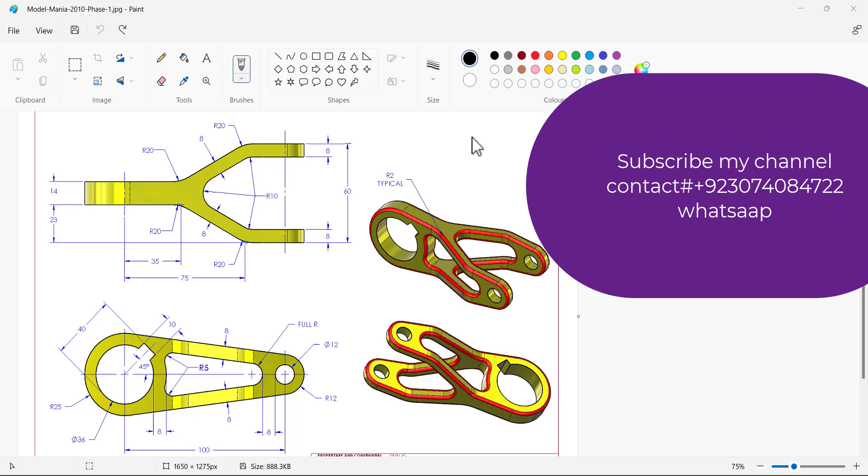Maybe you all know the Model Mania, the SolidWorks Model Mania competition for students. Every year SolidWorks gives a model and they want us to design it. So today we are going to design this model.

By the look, maybe you feel that it is difficult, but it is not very difficult if you visualize this drawing. If you see this isometric view, you may feel it's something like difficult, but actually it's not. You just have to follow the drawing.

If you see this view, it is very simple. We have to draw two circles here and two circles here, and the dimensions of these circles are given, and we have to specify the distance between them, 100 millimeters, and then extrude this sketch for 60 millimeters. After that, we are going to make some cuts here and here. The dimension is 8 mm.

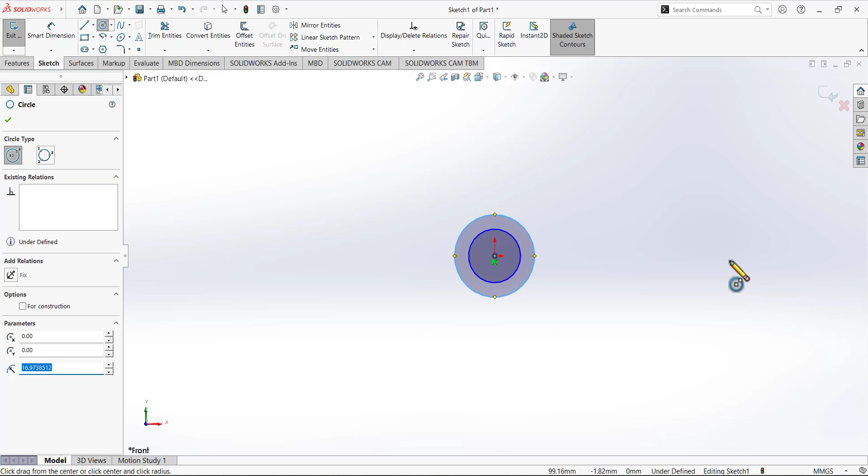So we are going to design this model in SolidWorks. I'm going to open the sketch on the front plane. I'm going to draw circles like that, and two circles here.

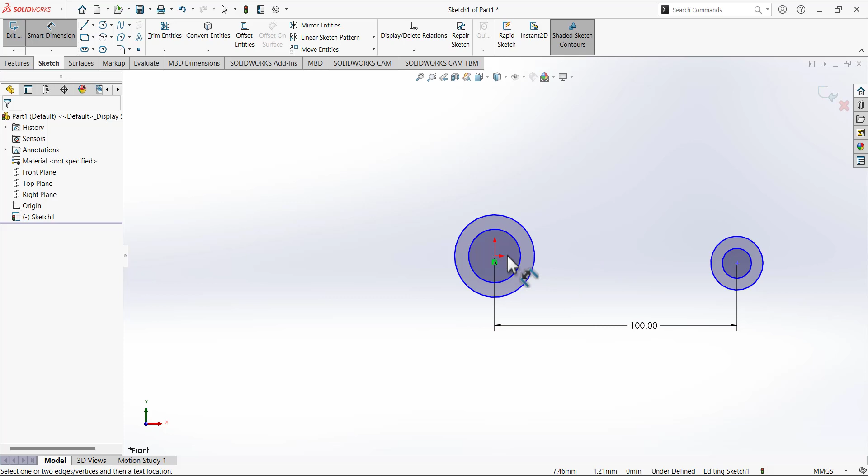The distance between these two circles is 100 mm. So I am going to put this distance, which is 100, and I am going to define a relation between this point and this point. This relation is horizontal. We are going to add the relation, select this center, and add a relation of horizontal.

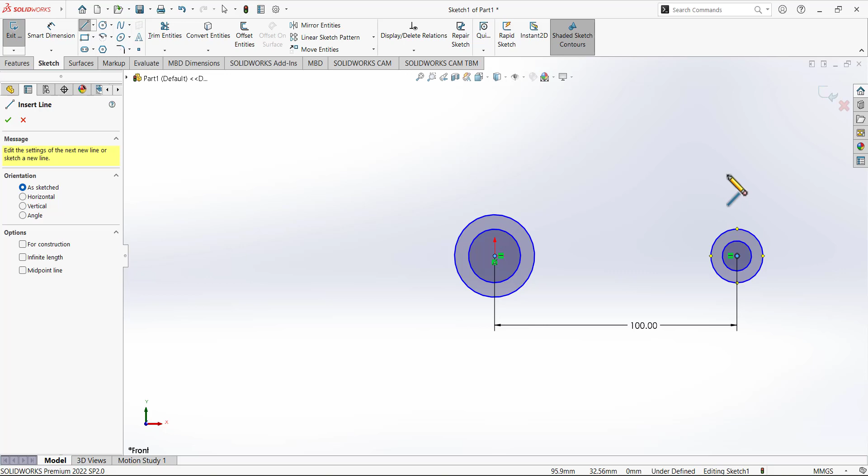And then we are going to draw two lines connecting these two circles and make sure you add the tangent relation between them. So I'm going to draw a line, and again draw a line from here to here. Then I'm going to power trim this one and this one.

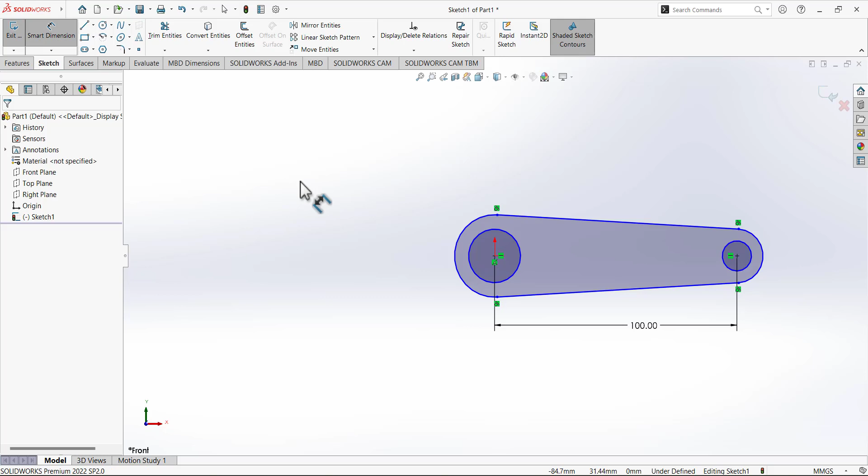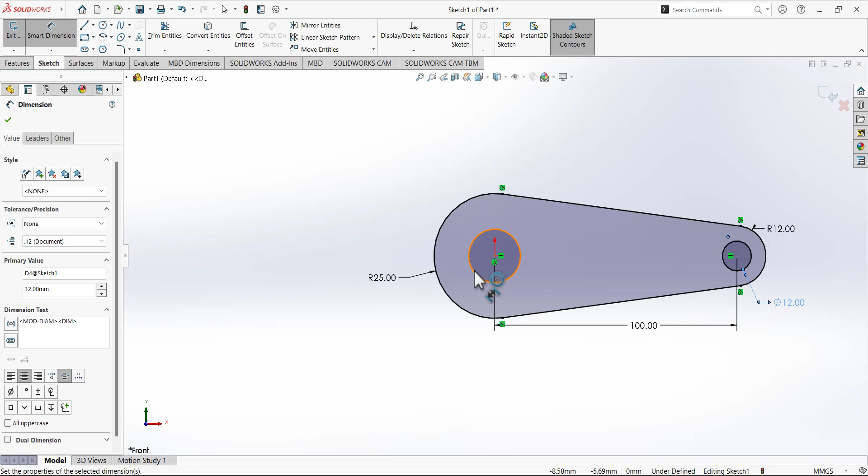Now we need to define the dimension between these two circles. So smart dimension of this is given as 25, and this is given as 12. The diameter dimension of this circle is given as 12, and the dimension of this circle is given as 36. So 36, 25, we added these dimensions.

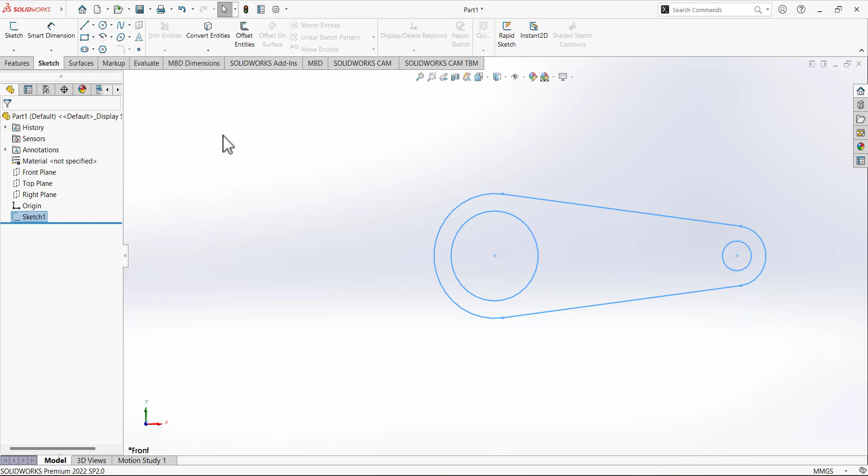And we can see it's already fully defined. So we are going to exit this sketch, go to feature, and extrude this sketch. We are going to use the mid plane, and the depth will be 60 mm.

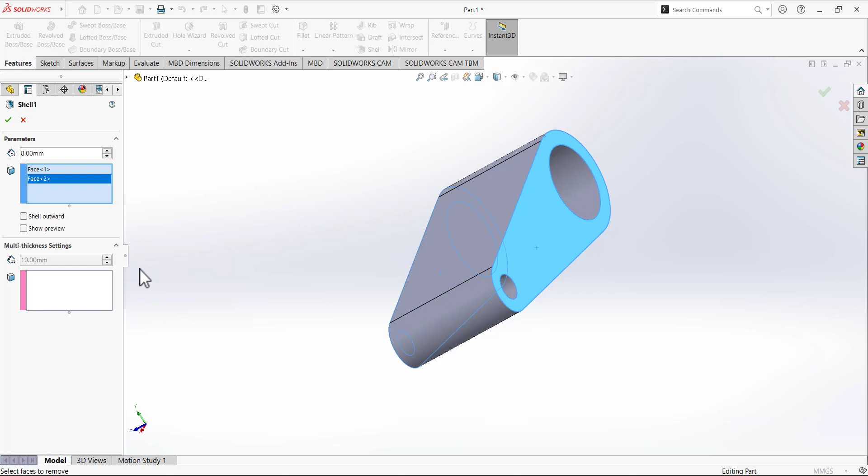So make it isometric, and then we need to make this cut, this one. We are going to use the shell feature and put the thickness 8. This is going to be 8. We are going to select this side and press OK. So here we have the shell.

Then we need to add some fillets. This fillet is 5 mm. Go to the fillet. We select 5 and pick this edge and this edge. And we are going to press OK.

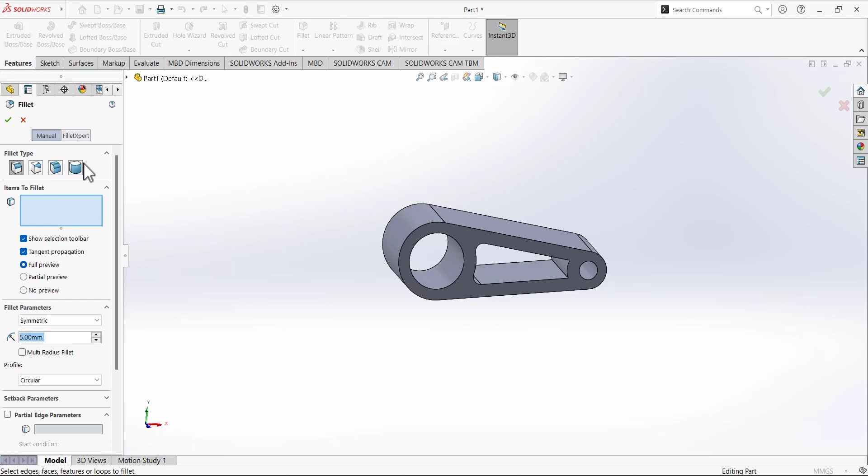We also need a fillet here, this one, it's a full round. So we are going to use this full round fillet. We are going to select this top, and for this selection we are going to select this surface, and for the third selection we are going to select this surface. As you can see, we have the full radius fillet here. Press OK.

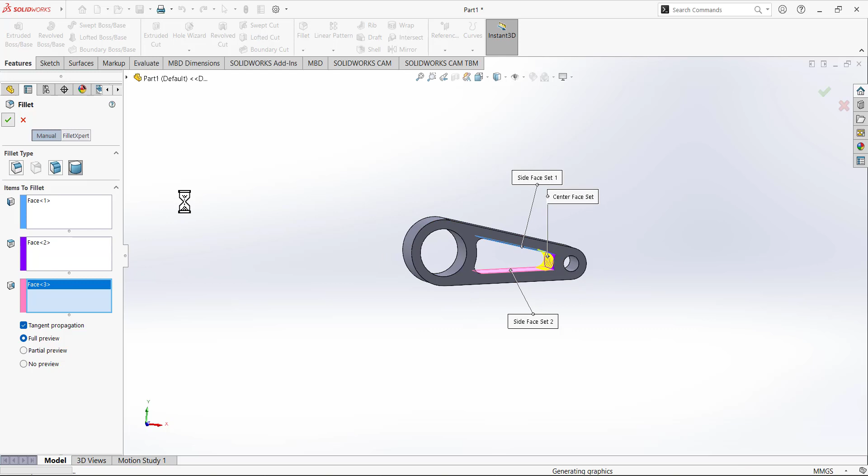So we are done here. We can also draw this cut here. We can do that by different ways. So I am going to select this sketch and select this front face. And I am going to draw a 3-point corner rectangle: first point, second point, and third point. And then we need to give the dimension.

So first I am going to add the relation. We can add the relation by using display-delete relations, or we can also add the relation by pressing control on the keyboard, select this line and this point, and add a midpoint between them. Then we need to define the other dimension for it.

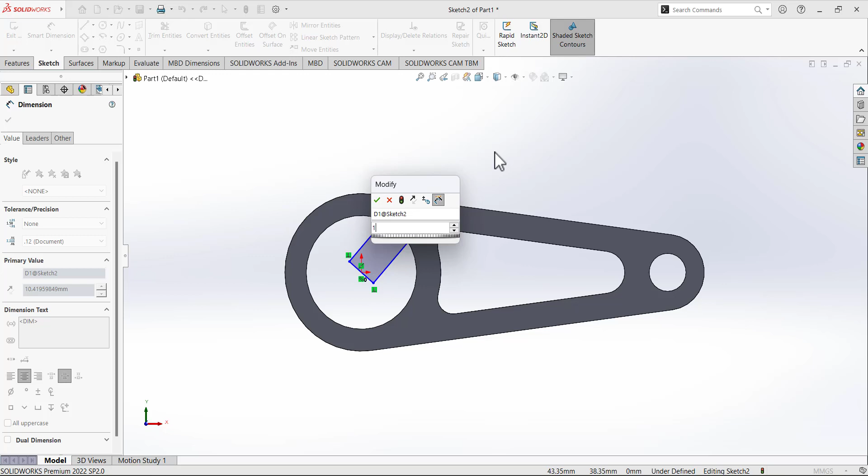So select the smart dimension tool, select this one, and this aligned dimension is 10, and from this line to this circle, we needed to press shift, and this aligned dimension is given as 40. Next, we have to define the angle. So the angle is given as 45.

Here we have the angle. We can add this angle by selecting the right plane and this line. We needed an angle of 45.

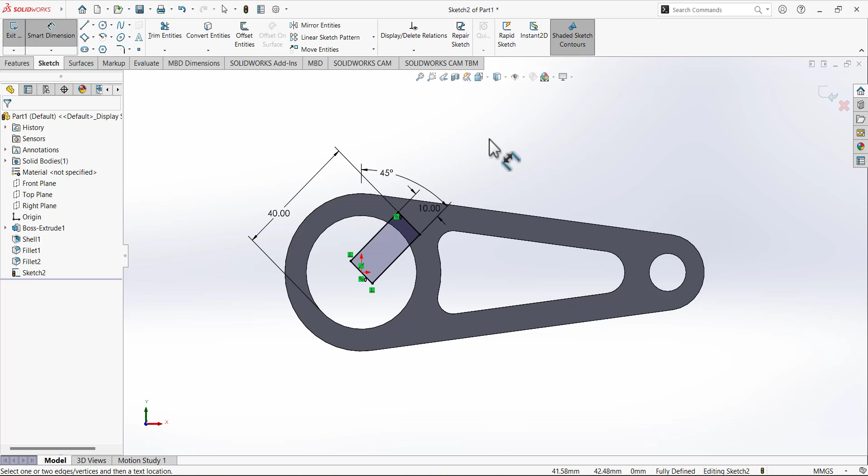So this sketch is fully defined. We are going to exit this sketch, go to feature command, and we have to remove some material. That's why we use the extrude cut, and for the direction we select through all.

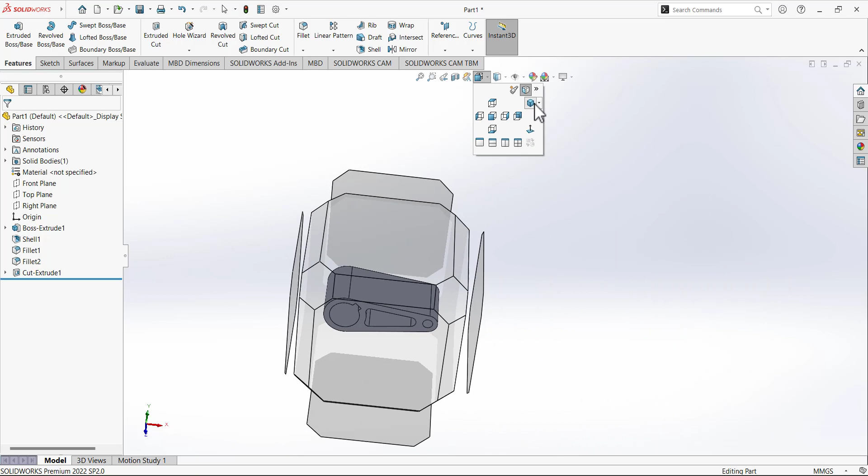We needed this sketch cutting all the material all the way. At this point we completed the first feature. Now we needed to open the sketch on the top plane, and we are going to draw this sketch.

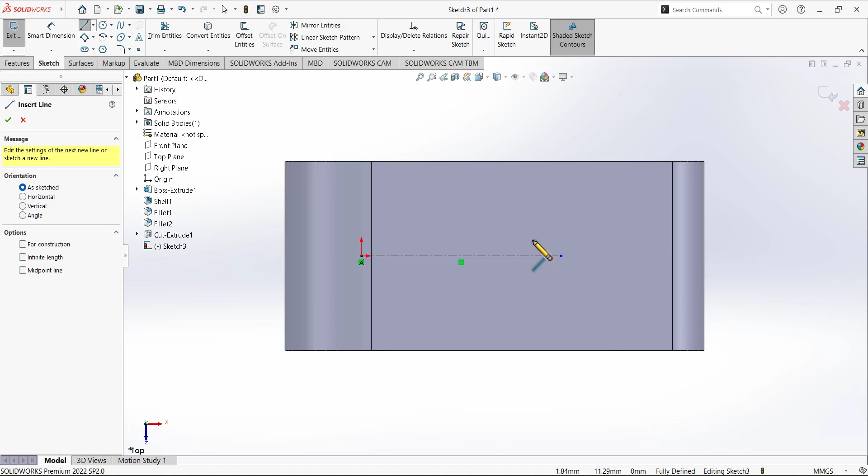This sketch we are going to draw like that. So first we draw a center line from this point like that, and we are going to draw this sketch like that. Starting from here, like that, like that, and like that, and from here to here, and we needed this line, a parallel line with reference to this line.

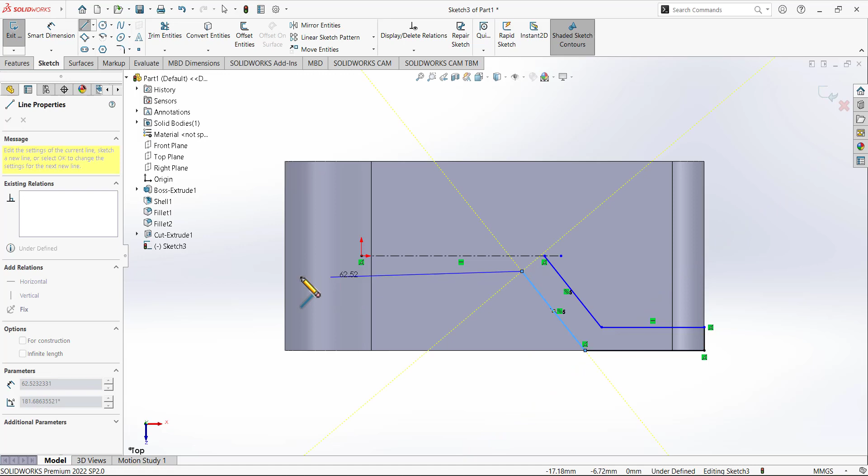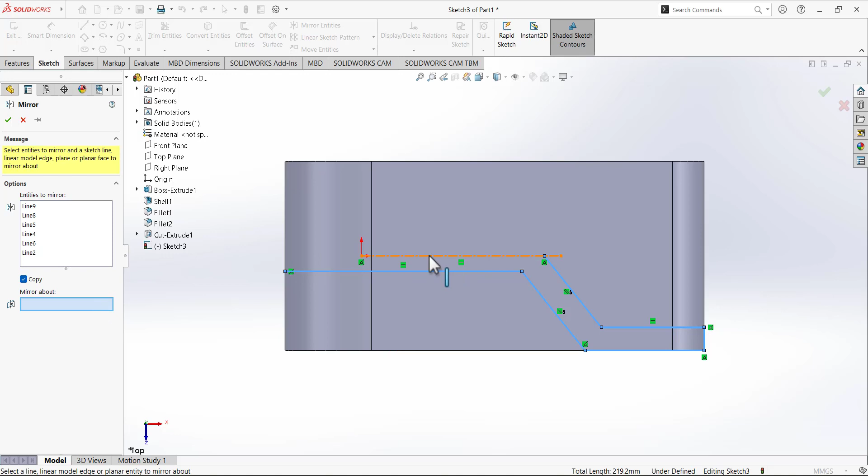So the horizontal is activated like that, straight line, and then we just mirror this portion of the sketch. We select the mirror tool, the intent is we want this line, this line, this line, this line, this line, this line, mirror with reference to this line, and just close this sketch by selecting this point and this point.

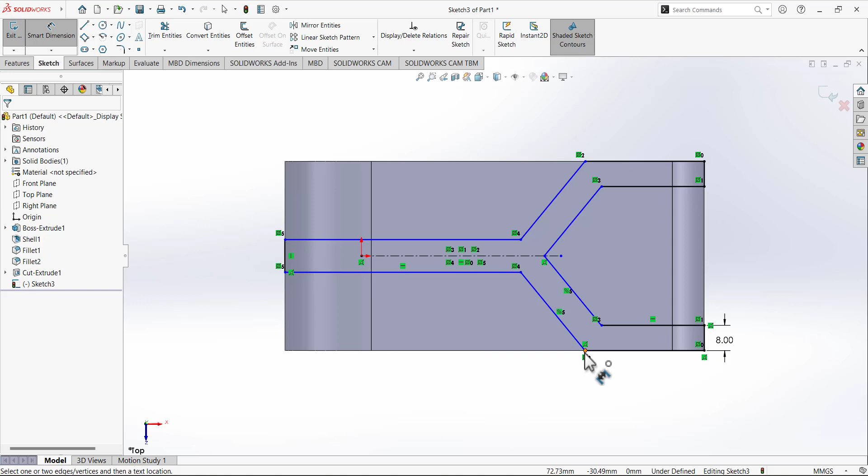Okay, now we needed to define the dimension. So this dimension is 8. Dimension from this point to this line is given as 75.

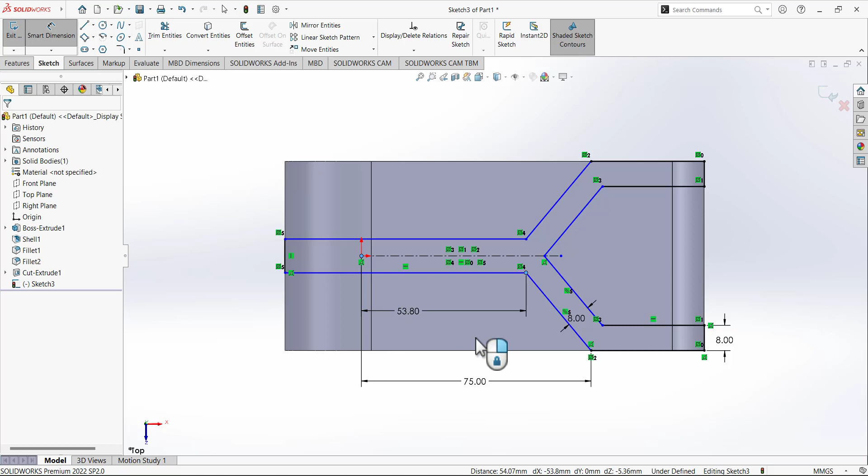This dimension is also 8. From this point to this line, this dimension is given as 35. And this dimension is given as 14. So as you can see, it's fully defined. This sketch is fully defined.

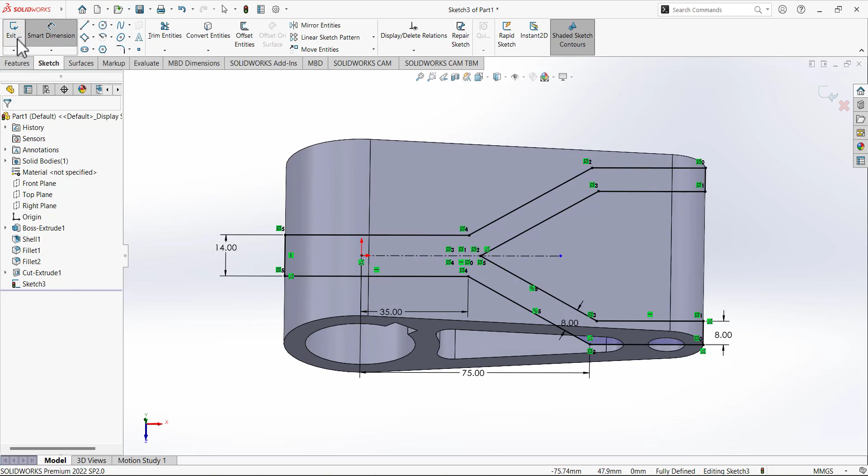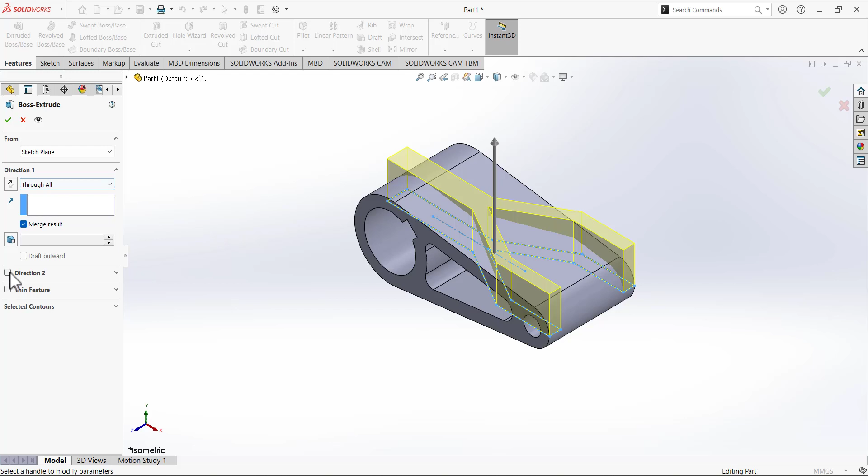Exit the sketch, and now we are going to extrude this sketch. At this point, we basically have different ways to make this model, so I am going to just display one method to get the result which we needed. We are going to use the direction through all. In direction one, we select through all. In direction two, we select through all.

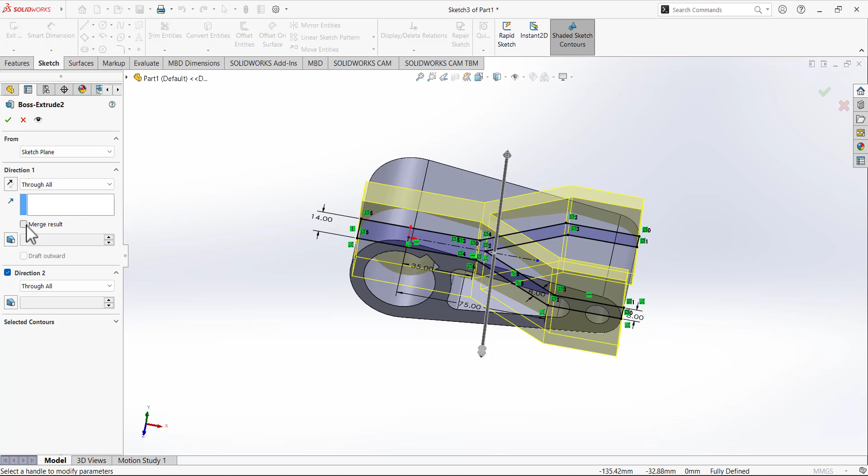We have to select these two lines, and don't deselect, uncheck the merge result, and press OK. Now we basically have, sorry, two bodies.

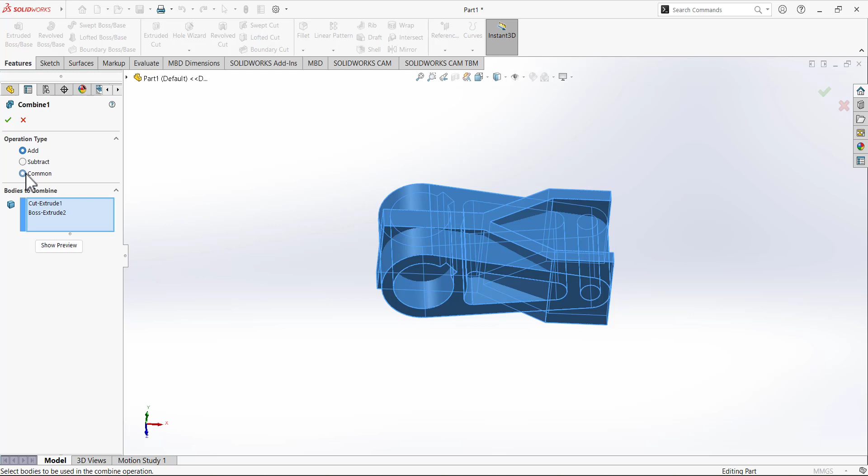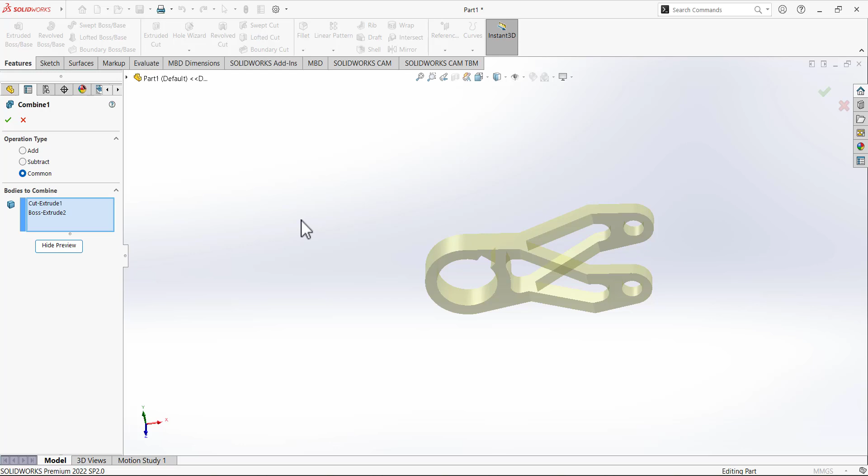One this body and the other is this body. As you can see, we have two bodies also appearing here in the solid bodies. So we are going to select these two bodies and use the command called combine. I am going to select common and then select show preview. This is what we needed. For these two bodies, we select common, so it's showing only the bodies which are common and deleting the rest. We select that, and we got our final model.

The only thing left now is some fillets here, and some fillets here, for a radius of 2.

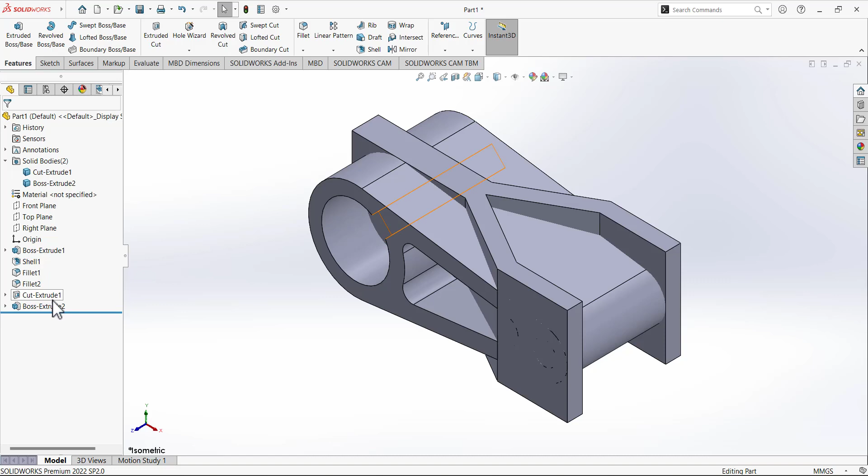Okay, let's also show the other method. I am going to delete this one, and for the boss extruded I am also going to delete it. So next, select the sketch and select cut extruded, select through, and also through for the other side.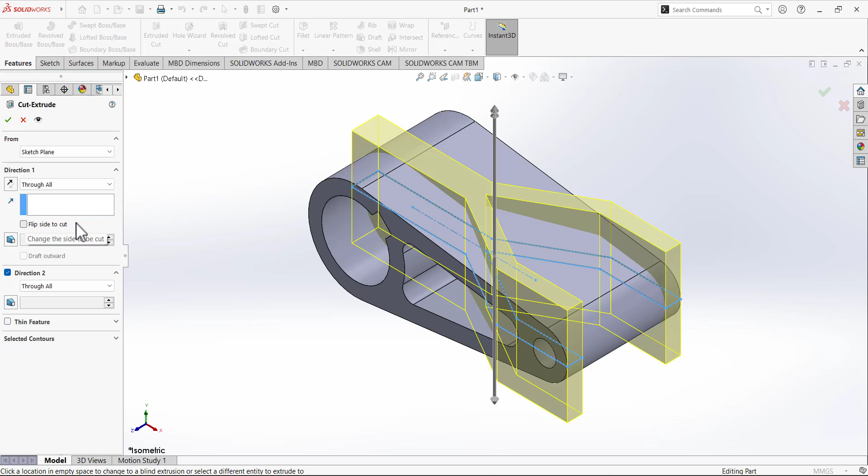And here we are going to select the flip side cut. If you don't know what flip side cut means, let's see it. Basically it's just cutting everything outside from this sketch. So again we got the result.

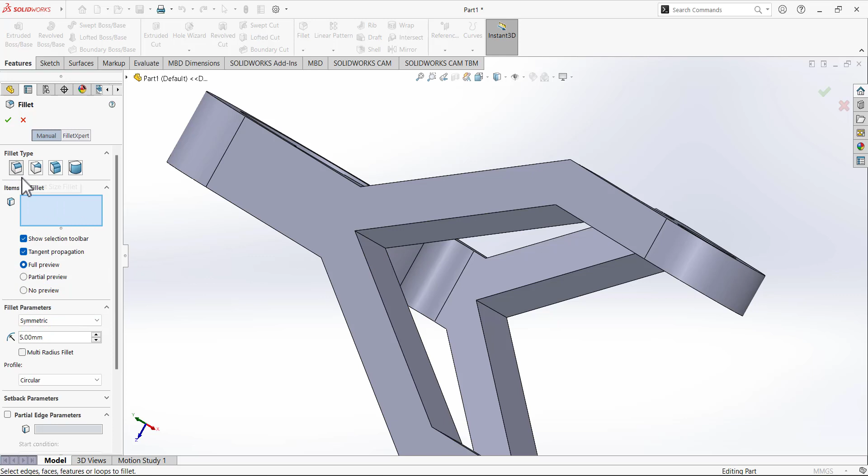So add the fillets. Select this first type of fillet, select this edge, not the face. We needed to select the edge.

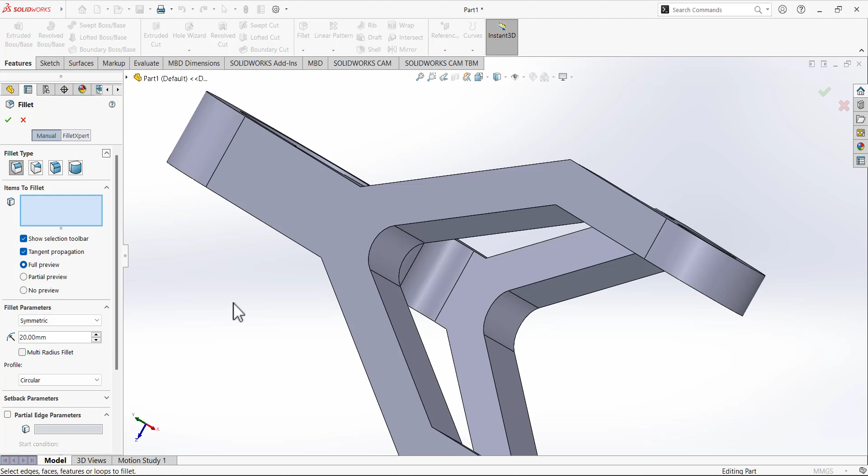Then again fillet, this time radius is 20. We are going to fillet this one, this and this edge, this edge, this edge, and these two edges. Click OK.

And again fillet, 2 mm.

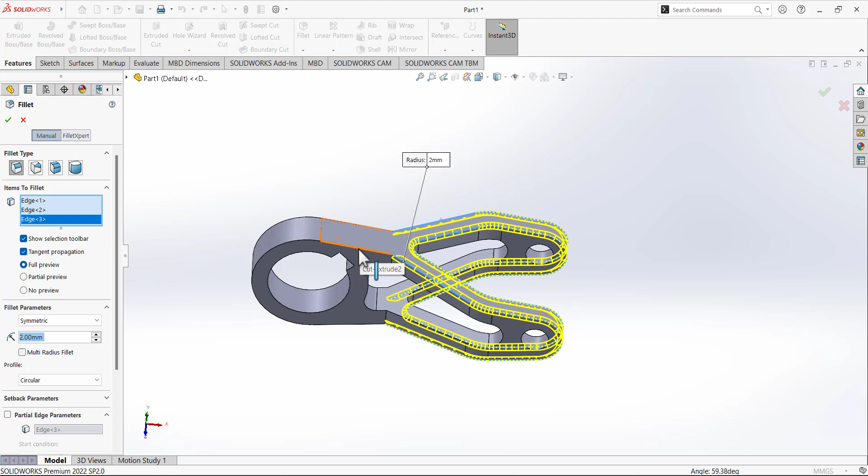So here is our final model. We can change the color and everything.